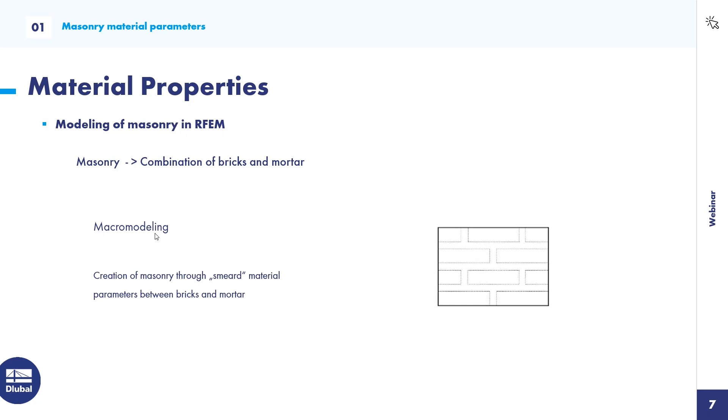The third and easier modeling approach is macro modeling. Here you create the masonry as one surface, and the material parameters between the bricks and the mortar are smeared above the whole surface. This means the modeling is easier and faster than the other two options. One small disadvantage is that if there's a crack anywhere in the masonry wall, you can't exactly define its location, for example in the mortar joint, because the parameters are smeared over the whole surface. But this macro modeling is what we use in RFEM.

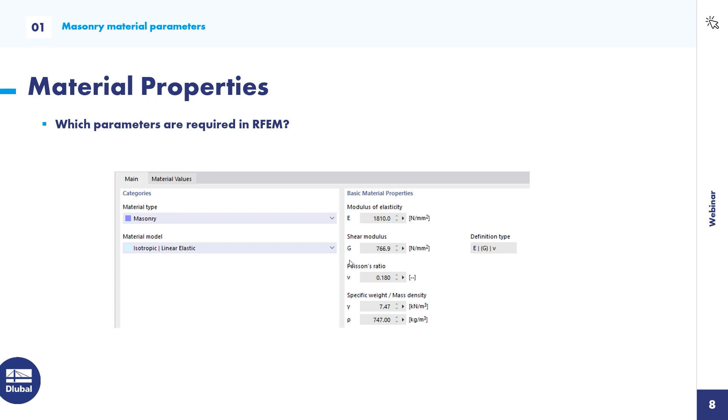So what do we need for material parameters in RFEM? For the first step, for computing the internal forces, we only need the modulus of elasticity and the shear modulus. This is everything we need for the first step. So how could we get an idea about these elastic moduli and shear moduli?

Here we find an answer in the Eurocode. The determination of the E modulus is defined by one factor. It's about 1000 for clay, in a range of 800 to 1250 for calcium silicate, or maybe 2050 to 2700 for manufactured stones. This, multiplied by fk, the characteristic strength, gives the E modulus. For small stones, for historic stones, you can add a factor for a small reduction of the E modulus according to the height of the brick and reference height. The shear modulus is quite easy because it's 40% of the E modulus in this direction.

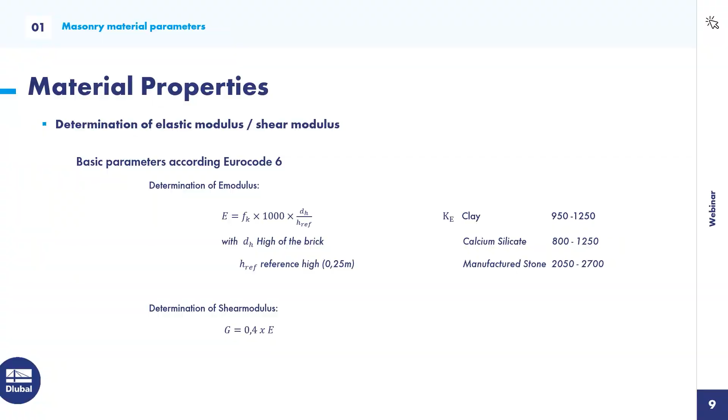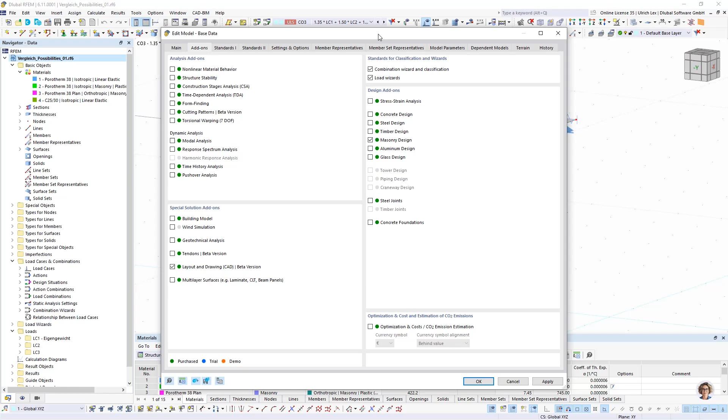Before I start modeling something, I want to check if in the add-ons in the base data my masonry design is checked on, because this is the most important thing if I want to work with masonry. Today I prepared a small example: one wall with a slab and a defined load above.

I want to show the differences between the material models. That's why I have created some materials, and I want to show you the differences now.

The first material is the isotropic linear elastic material model. This is our basic material model. It's the same for concrete or steel surfaces. You only need one E-module, elasticity module, and shear module to compute the internal forces.

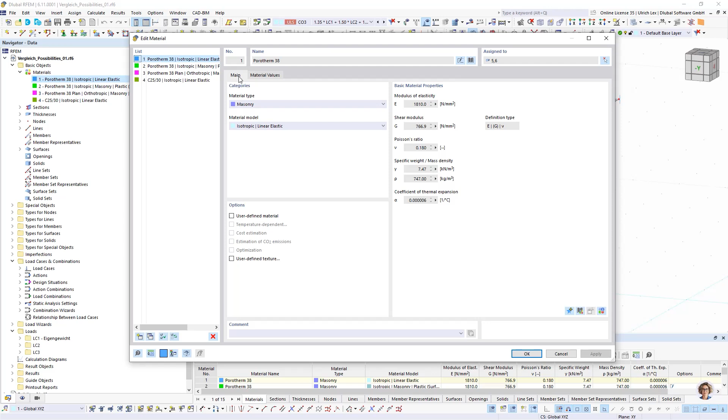When you have chosen the material type masonry, you also have the possibility to create an isotropic masonry plastic surface material model. The isotropic option means we have one E-module for both directions. In X and Y direction, we have only one module of elasticity.

With this plastic option, you can say that the limit stress for tension is reduced, because masonry cannot handle any stresses for tension - the wall will always crack if there is tension. The difference to the first material model is that there also tension can be computed; in this isotropic plastic material model it cannot. Here you have the possibility to set a limit of tension, but be careful - directly inserting 0 is not good, because the calculation will not work for a value of 0. So you have to insert a small value.

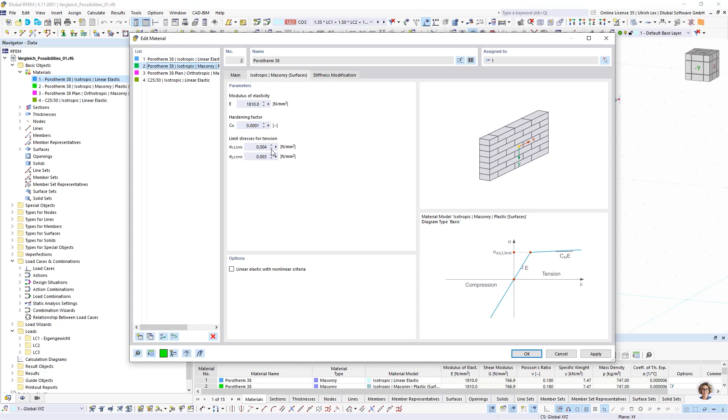The third option is orthotropic, and I would say this is the most exact material model for masonry, because here we have a different module of elasticity for the Y direction - the strong direction - and the X direction, the weak direction of the bricks. A shear module is considered too.

Additionally, you can limit not only the tensile strength, but also the compressive strength, and these allowable values from tensile and compressive strengths are computed according to the Eurocode. That would mean, if the calculation with this material model is done, then the design of this wall is done too.

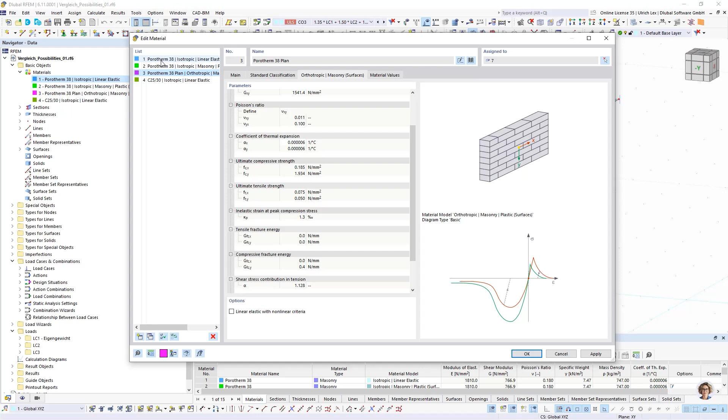So these are the three different material models we have in RFEM. As a last option, we have one type of thickness which we call shear-free. You can choose it in the thickness type: wall shear-free.

That means if you choose this thickness type, the wall can only transfer vertical loads from the top to the bottom, but no shear loads of the system. I will show you later where you can use this thickness type.

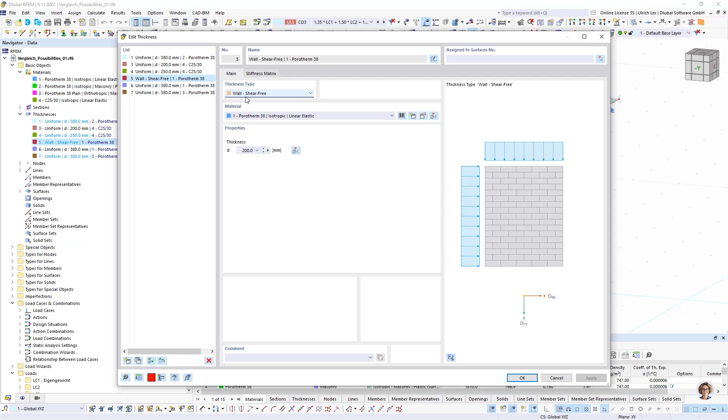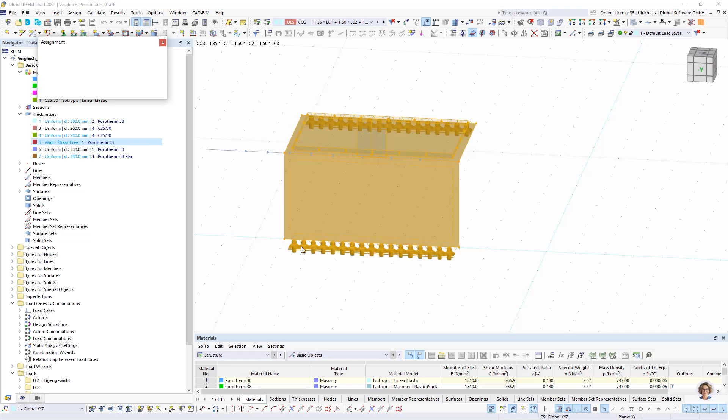Okay, to our system - here I created one masonry wall with a slab, and I want to assign this differently. I want to create more walls with copy, in this direction, and copy the loading too - 1, 2, 3 times.

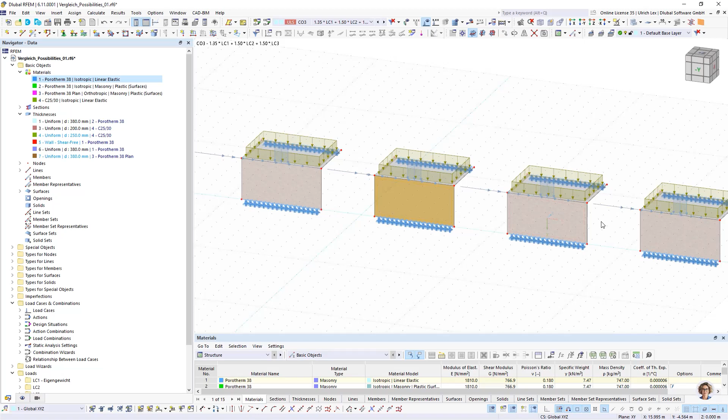So in the first wall I have to assign the isotropic material. In the second wall I want to consider the thickness with the isotropic masonry plastic. In the third case, I want to consider the orthotropic masonry plastic. And in the fourth part, I want to consider my shear wall with thickness type.

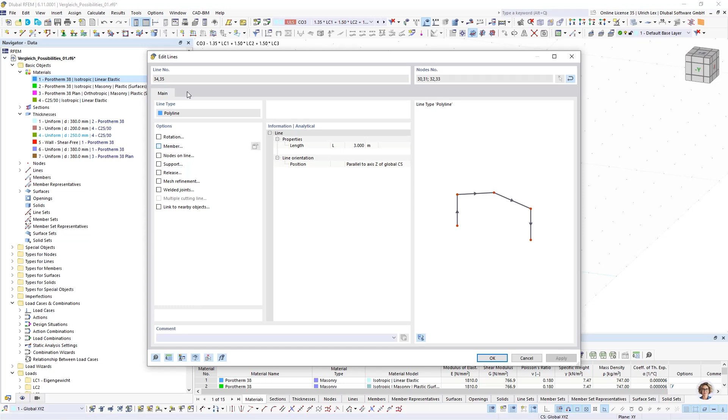For the shear wall thickness type and the horizontal load, I need some additional elements. That's why I added 2 beams, 2 members as a column, with a section from concrete. Okay, maybe for this case.

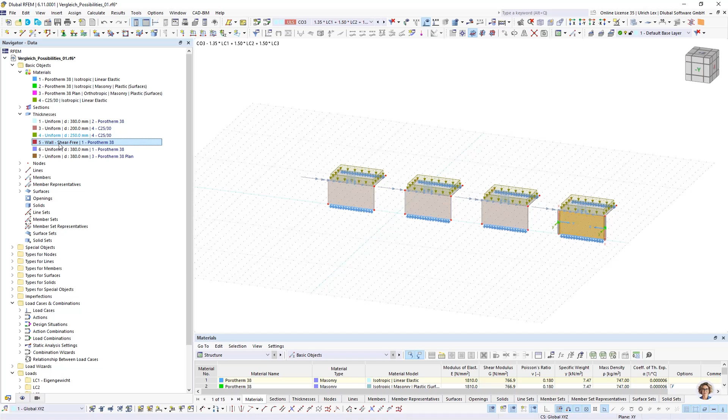So now I have defined in the first step the isotropic material model, the isotropic masonry, the orthotropic masonry, and in the last step the shear-free wall.

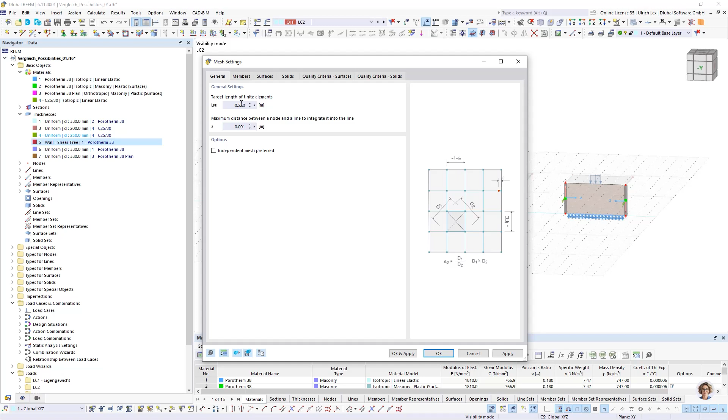So I want to take a look at the easiest load, the vertical load. A short look into the mesh settings - I have a mesh length of about 25 centimeters, and this is the value you have to use for masonry.

Okay, now I can compute this first load case.

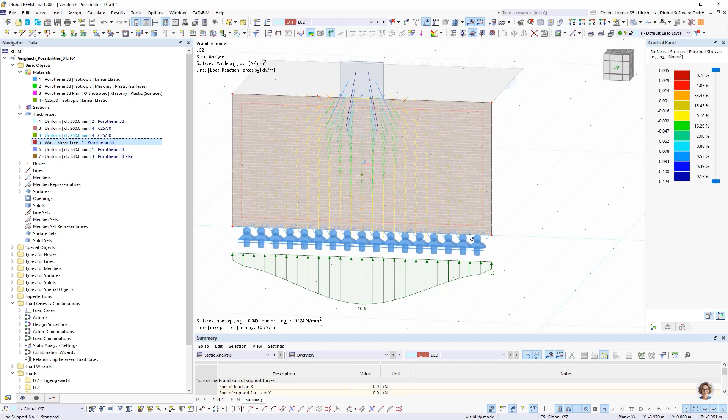So when we take a look on the results, I want to look at the stresses. Here I have something like the load trajectories, where you can see how the load is transferred in the surface. We see for our first isotropic system that the load is transferred above the whole length of the wall.

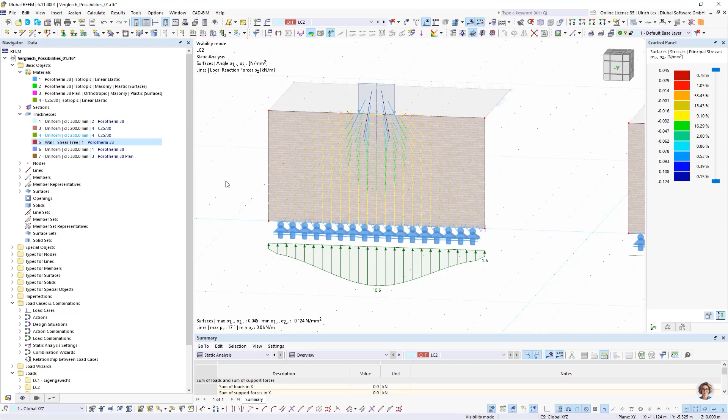This is not as expected, because we would think that the load is transferred at an angle of 60 degrees, and the other parts of the surface did not get any force. But for the basic isotropic linear elastic material model, it's not as expected for masonry systems. When we take a look on the second system...

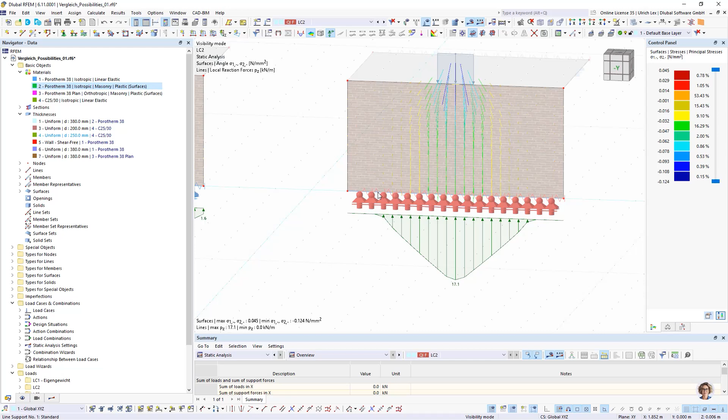It's better. Here we have no tension force in the system, and therefore I have not such a big transferring to the sides. You see on the support reactions that the load is transferred at some angle from the top to the downside.

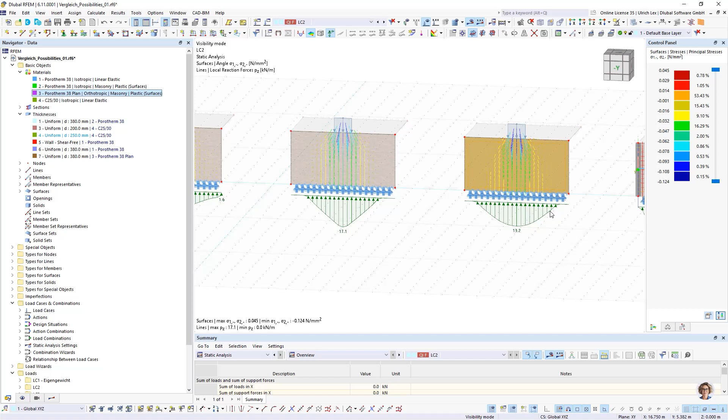When we take a look on the orthotropic system, you can see it's better than the other two. It's more homogeneous, and it's transferred like expected.

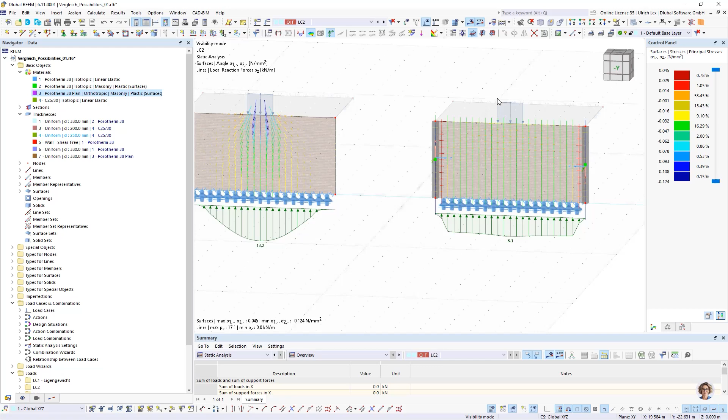In the last part, you will see that there are only vertical loads in the system because of the members on the side. You have a homogeneous transferring from the top to the bottom, but you have only straight loads in the system. It will be more clear when we have this horizontal load in the system too.

So when we add this horizontal load, I want to take a look on the load combination, because in case of a horizontal load, you always need a vertical load, maybe self-weight or an additional vertical load, because masonry cannot handle tension forces - you cannot compute only horizontal loads on the system.

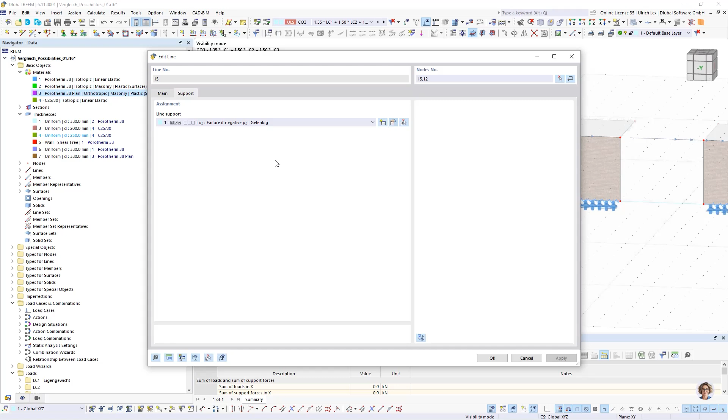For this calculation, I have to modify the support conditions. I have to fix it in the X direction. And now I can compute this load case again.

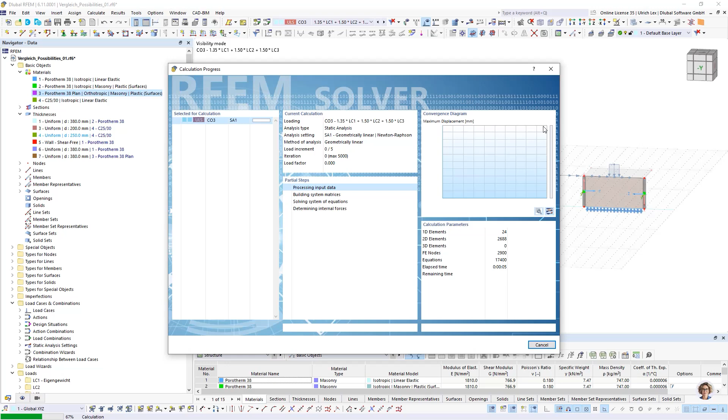Here we can again see that the load transferring of the internal force of our isotropic system is not as expected. Here I can change it one more time, then it's more clear.

I can deactivate the nonlinearity, so we can see also the tension in the system, when we compute it again.

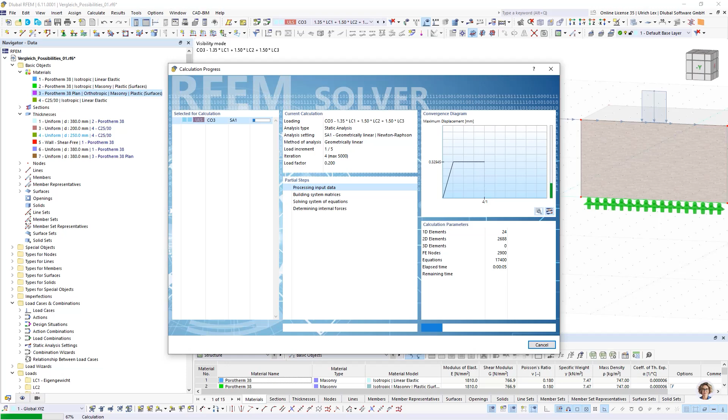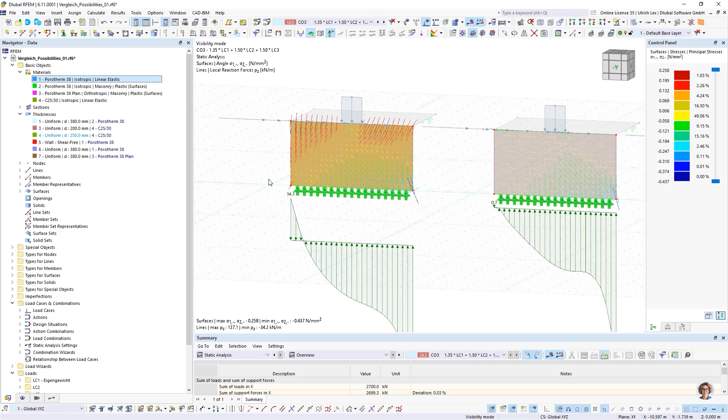So in our isotropic material model, it's quite better. You see that this horizontal load comes into the surface and it's transferred in this direction to the bottom of the surface. It's like expected, but...

because of the fact that we have only an isotropic system, so the E modulus in both directions is the same, this exact shear behavior of the masonry is not so well considered with this material model.

The most exact system is the orthotropic one. Here you can see that only compression is present like it's defined in the material, and the pressure is transferred in the right way...

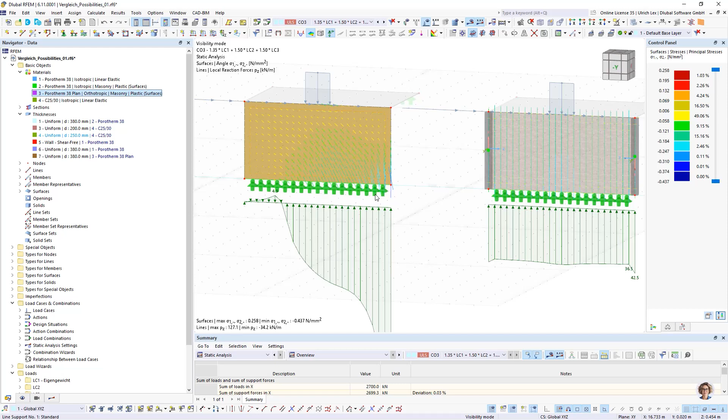to the supports. In the last option, you will see that the masonry wall gets no horizontal loads. There are only vertical trajectories in the system. Here also we can take a look at the internal forces.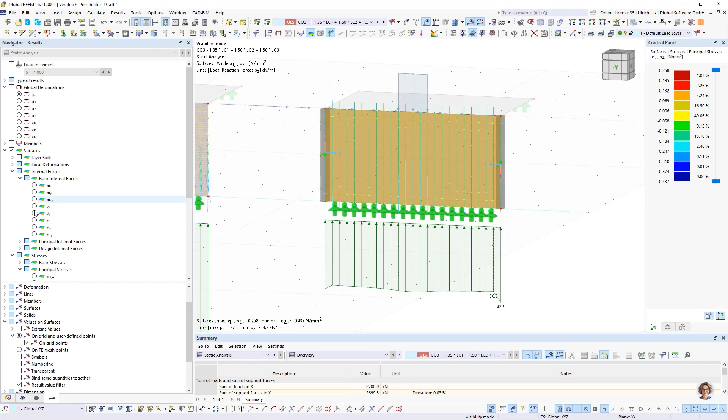We only have vertical loads Ny in the system. This horizontal load has to be - something has to be created for this horizontal load. That's why I added these concrete columns.

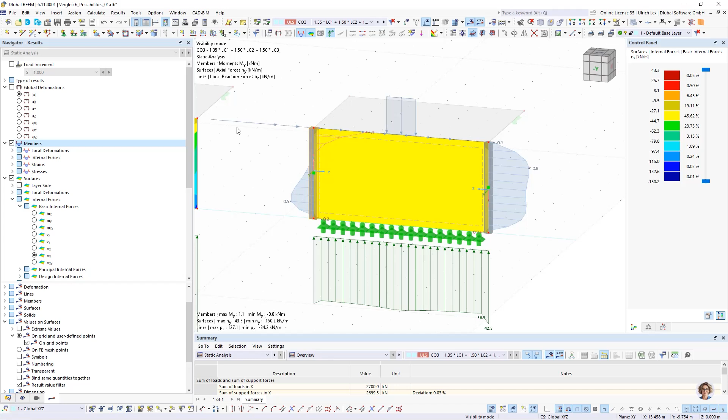You see here is a moment in this member, because this surface cannot handle shear forces.

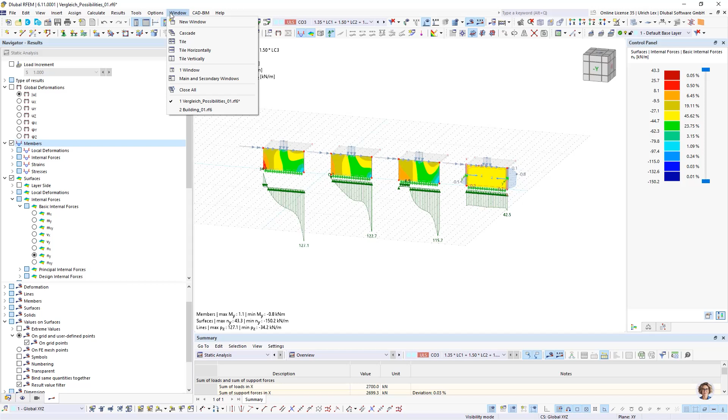Okay, this was the explanation of the different material models, and on this part I want to switch to the second example, to a small building where we can now create the masonry walls and compute this.

So I have created some building, two floors with concrete slabs. In the front, some columns in concrete, and in the back I want to consider masonry walls. Therefore I defined some materials.

One, the isotropic masonry material model for the surfaces that should act for shear forces, and for the walls inside the building, I do not want to consider shear. There I have to create the isotropic material model and use the thickness type wall shear free.

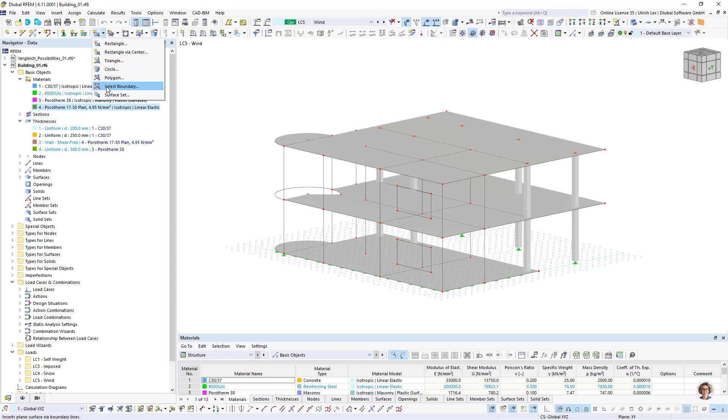So when this is defined, I can continue with creating the surfaces. I use the option boundary lines. I choose my thickness, and create the walls. So it's quite easy when the lines are there.

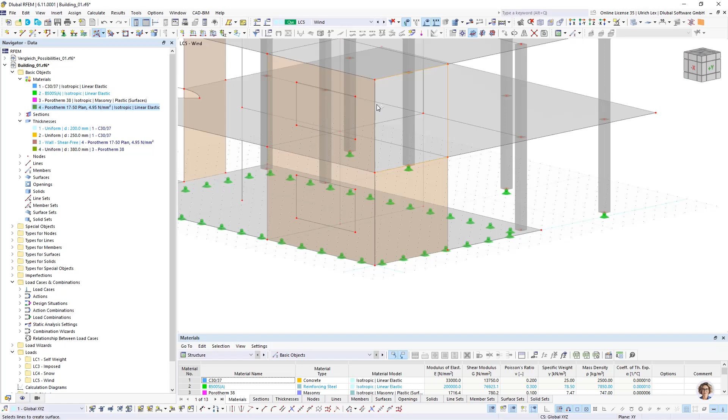And the last one. Okay, for the inner walls, I want to use the thickness shear free and create here my inner walls.

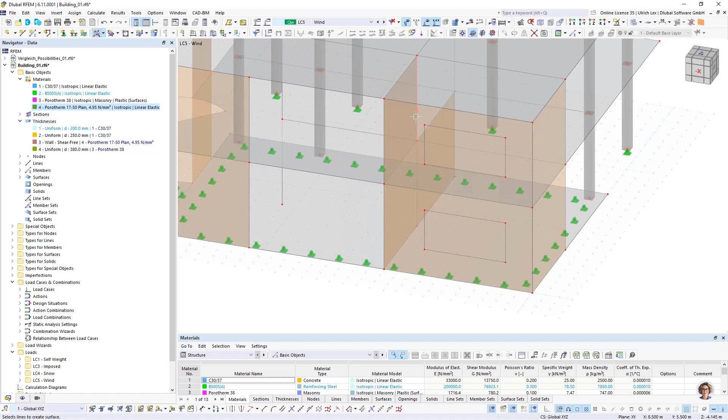So, and upside, I have here one wall. Here I see there is no column. I want to add it here as this member with the section in concrete.

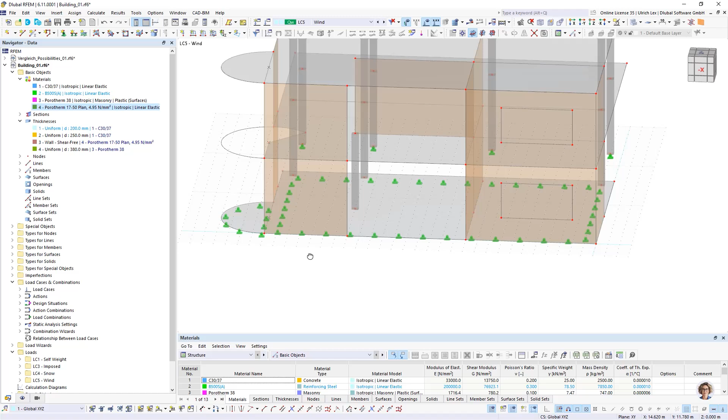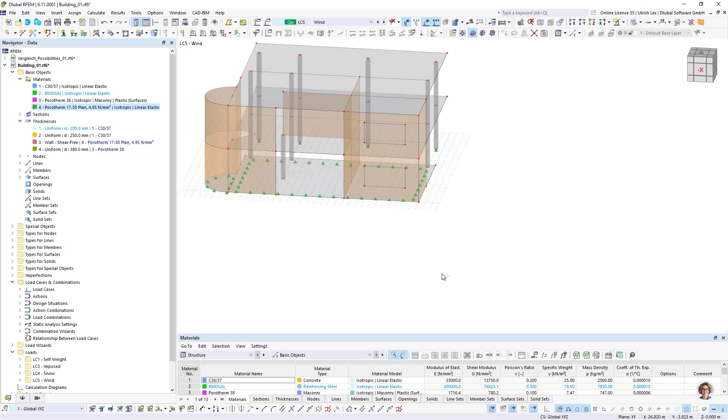Also a curved surface is no problem, but I have to use the quadrangle surface. One, two, three, and four. So then all walls are created.

On these surfaces, I want to add a window, maybe an opening. Here also I can use the option graphically and select only my lines. The opening will be created automatically.

On this part, it's important for masonry that when we have some big openings, we always have to assign something like a lintel above the opening, because the masonry cannot transfer or cannot handle tension forces.

And if a big load is assigned, or if the opening is too big, then there would be a lot of tension forces, and this would lead to an instability of the calculation, because the wall cannot handle tension forces, and they could not be transferred to the side. That's why we have to add something like a lintel.

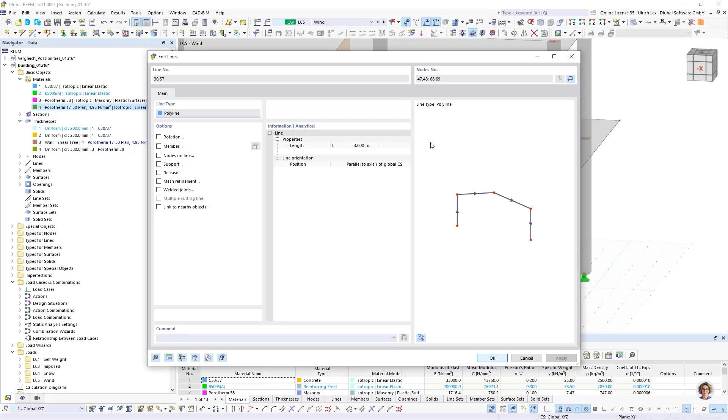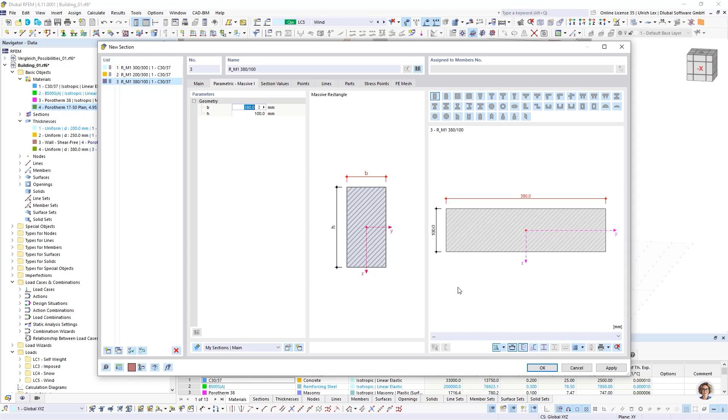I assign a member and create here a new section, maybe with concrete, with the width of the wall, and the height maybe 10 centimeters. Okay.

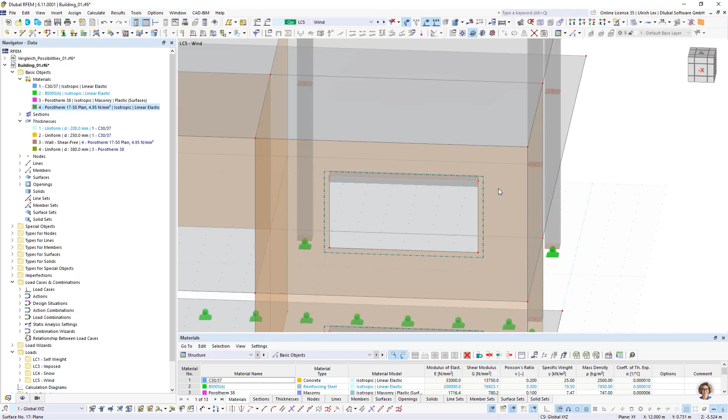For bigger openings, it would be good to create it inside the wall a little bit, so that the load is not transferred on one edge here. But in this case, it's okay in this way too.

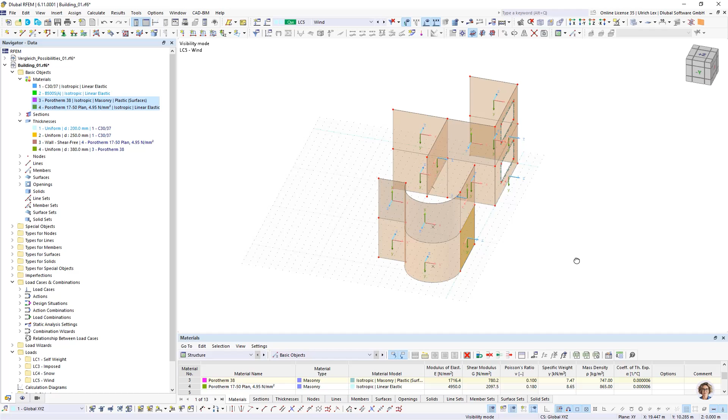Okay, then as a next step, I want to take a look. I want to select all my masonry walls. I want to take a look on the axis systems, because it's better for interpreting the results when the local x direction or the local axis system is oriented in the same direction.

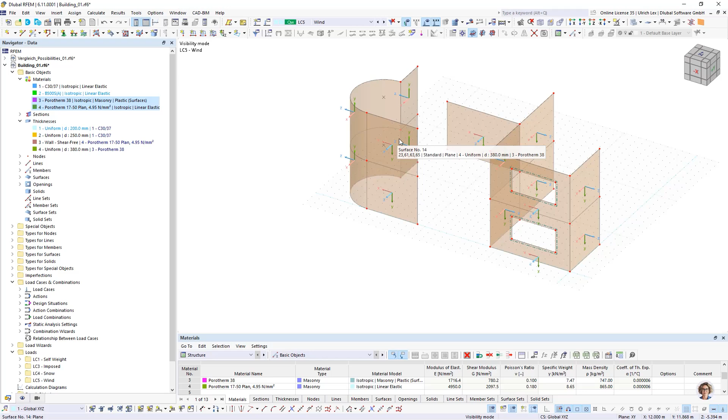Maybe local z goes outside of the building. Therefore, I have to reverse this, and here. Then I can say, when I take maybe a look on the stresses, that all stresses with sigma x positive is outside of the surface, and sigma x negative is inside of the surface.

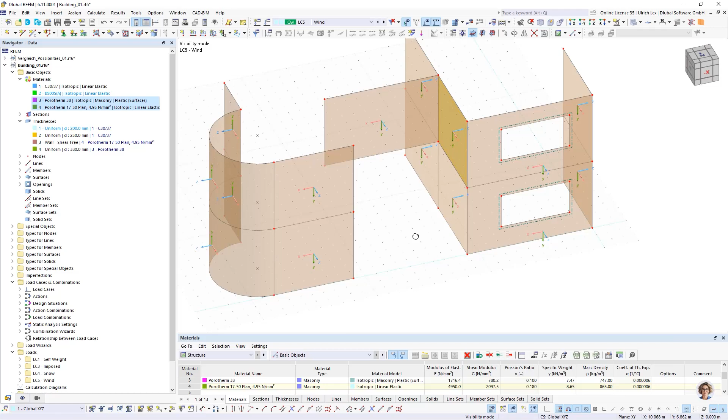Here it's okay. This wall is orientated in a different way. And then it's okay.

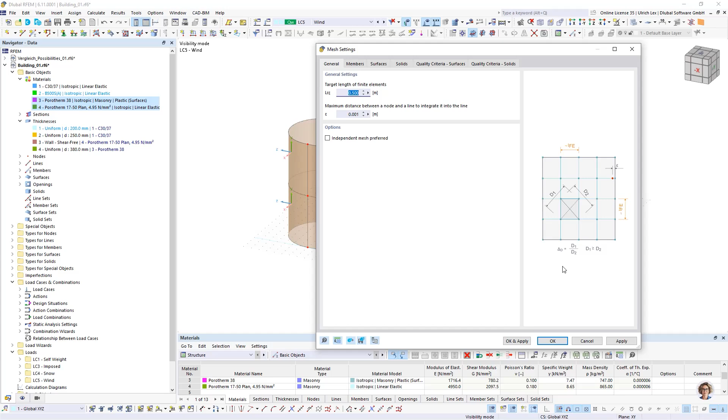As a next step, I want to take a look on the FE mesh settings. Here globally 0.5 meters assigned. It's okay for the concrete elements, I would say, but for the masonry I would use a finer mesh. Therefore I can select all surfaces, edit, and assign mesh refinement. I can create a new one, 0.25 meters. Okay.

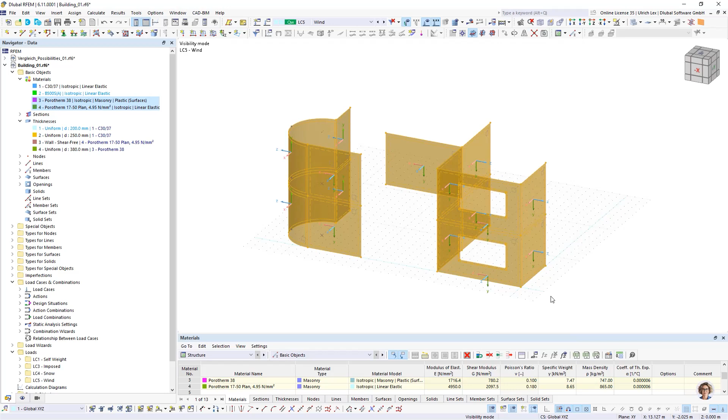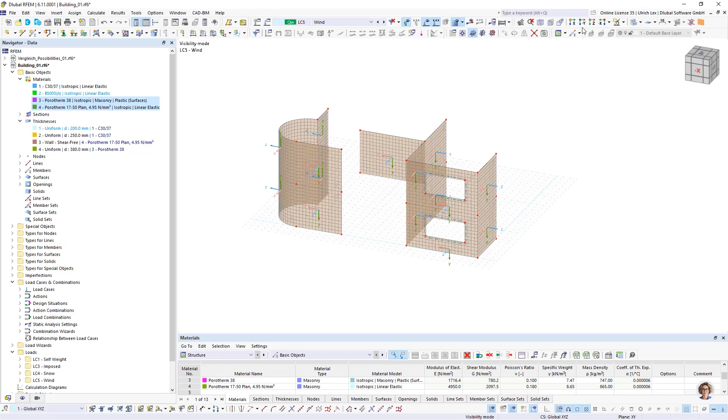And I want to check it, if I would say a nice FE mesh is created, or if I have to refine it in another part, but it looks good on the steps, then everything is okay. So then I think we have finished the modeling.

Then we can take a look on the loading. I want to deactivate the local, so we can take a look at the loading. I have created a load case for the self weight, for the imposed load, a snow load on the top, and I want to design some wind load in one direction, here in global x direction. Here I can create a new additional surface.

Again, I can select the boundary and use the stiffness type load transfer. Here I have a lot of different options for how the transfer direction should be, maybe only in x direction of the surface, in y direction, or in both directions with stripes. Or the more exact thing would be the isotropic FEA option, but in our case I think the stripes are okay.

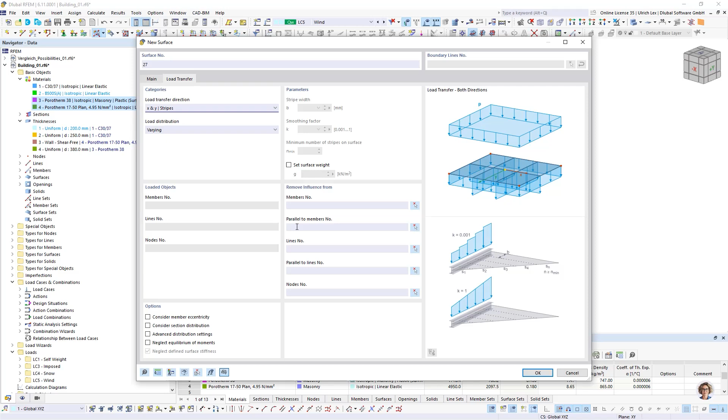I could remove some objects which should not be loaded. In our case it's okay. Can continue with okay, and can create here this surface. The same I can do for big openings.

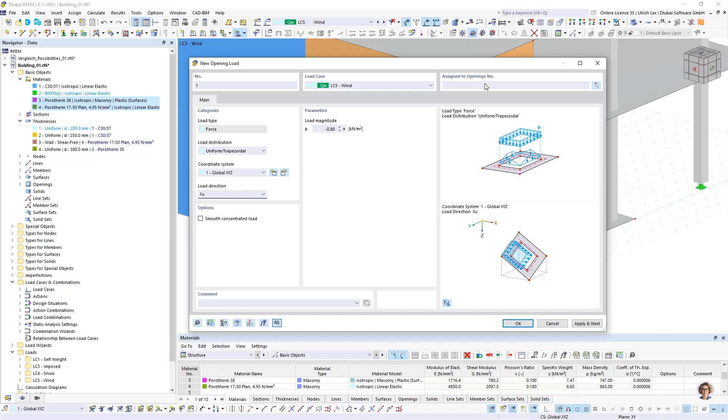For openings, I would have a second option, to create directly a load on the opening with new opening load. Here I want to show both options. For the new opening load, I can use one value in X direction and can choose opening. Okay. Then automatically this load will be transferred to the lines around the opening.

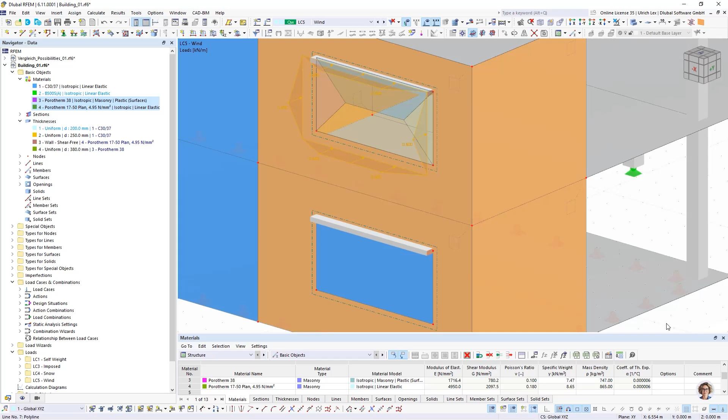I can show also the load on the boundary lines. So for the load transfer surface, I can use the default or the basic surface load, with the same value in my case, and can choose the surfaces where it should be acting. Okay.

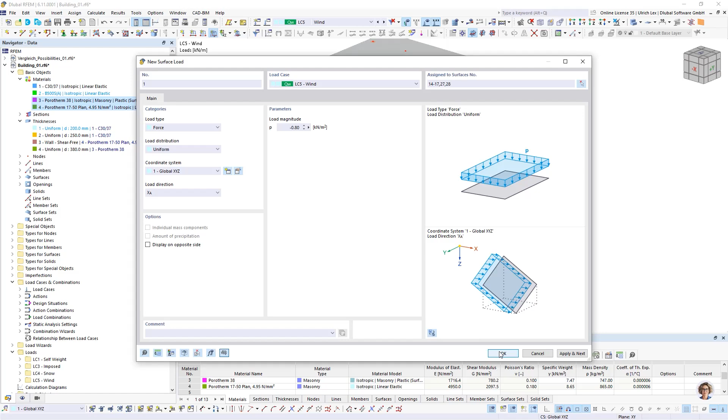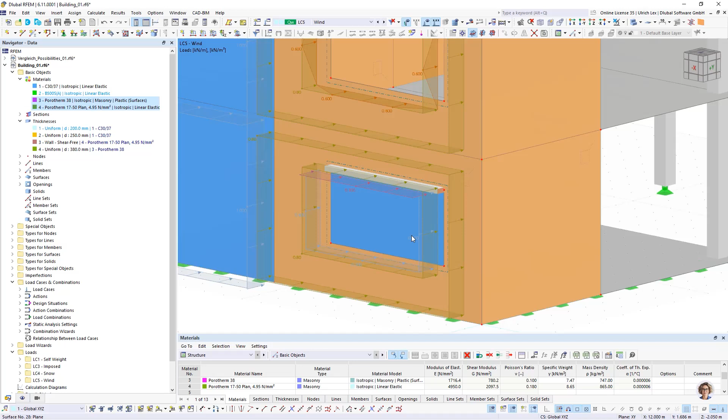Also for the load transfer load, I can show the distribution surface, what is acting on the separate lines. Here you see it's transferred to all lines in a linear way in the stripes of Y and X directions.

Okay, if we have everything defined, then we can start with calculation. Here I want to compute maybe one load case to take a look at the results.

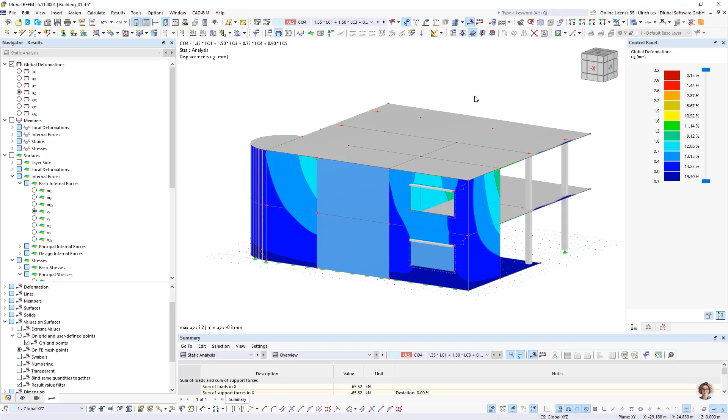The calculation was done without any errors. That's good, so everything is okay.

So now I want to show you the results of these inner walls, where we had used the thickness type shear wall, shear free wall.

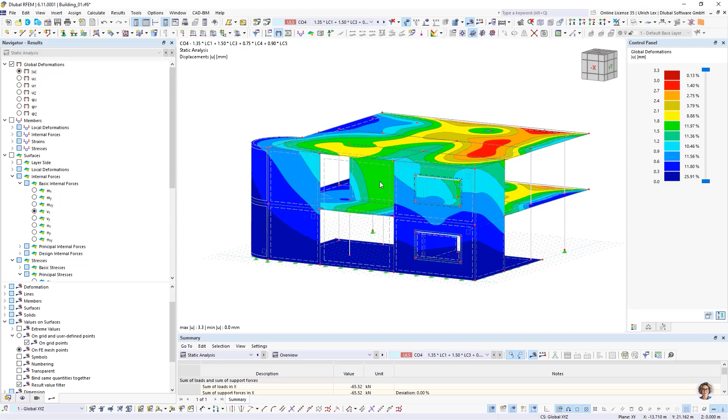I want to select only this. So here I can see when I take a look at the internal forces, the shear forces are 0. Also the moments are 0.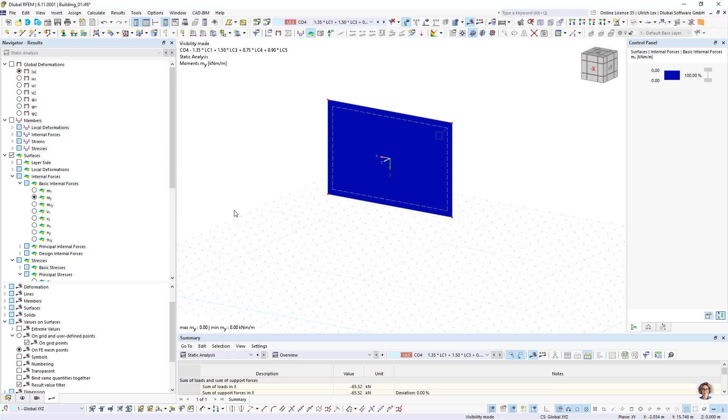When I take a look at the axis system, then my my is nearly 0. It's not exactly 0 because it could not be exact 0 in calculation.

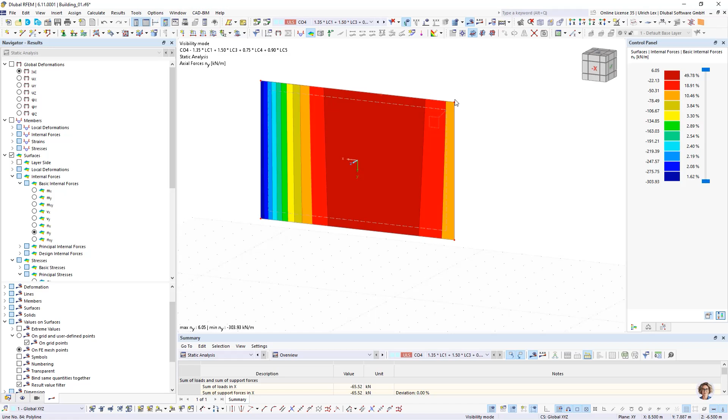So there are small loads in X direction, but I have big forces in Y direction. Therefore, I only have loads transferred from the slab in the second floor to the slab in the third floor.

That means this option or this thickness type is good when I have masonry walls where I have maybe a concrete structure that takes my shear forces, and I want only have the self-weight or a transferring of loads from the upper slab to the slab downside. Then I can use this thickness type shear free, or this wall shear free.

In case that the masonry wall should also act for shear forces, then we should use this isotropic masonry or this orthotropic masonry.

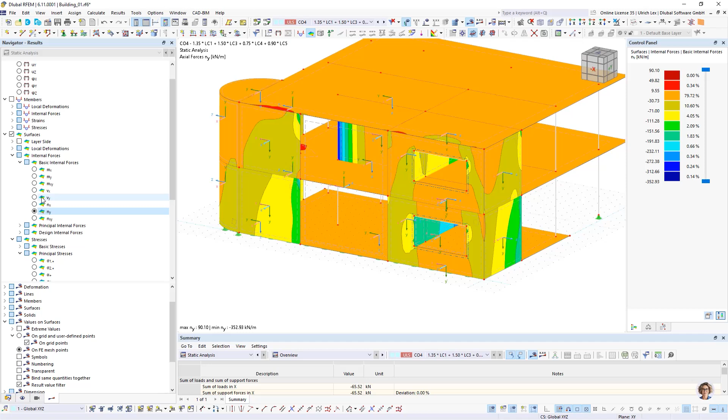For this isotropic masonry material model, I can now take maybe a look here. Here we see that we have load transferring, we have stresses in X and Y direction.

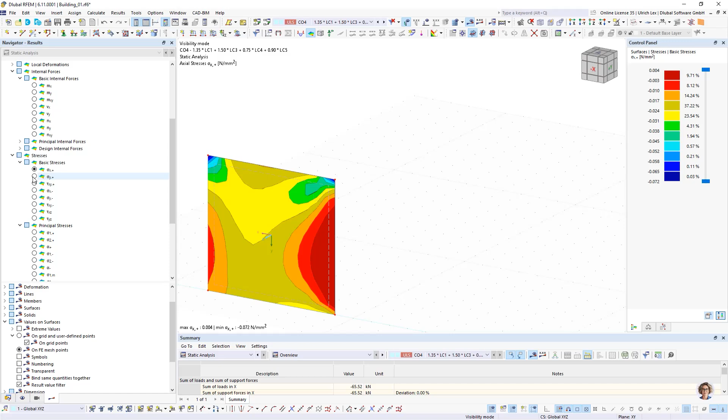When I take a look at this wall again, then we see that we have only tension forces in the defined limit, tension forces in the defined limit, and the pressure. So how could we interpret these results?

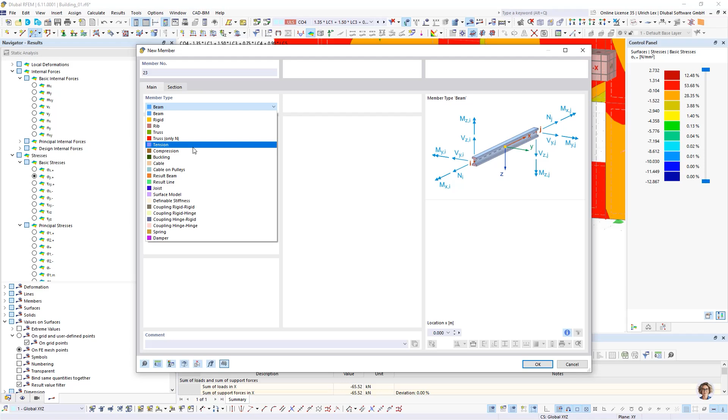You could insert here again a result beam. With the result beam, we could use here a block with 1 meter, where we want to include objects, maybe only this one.

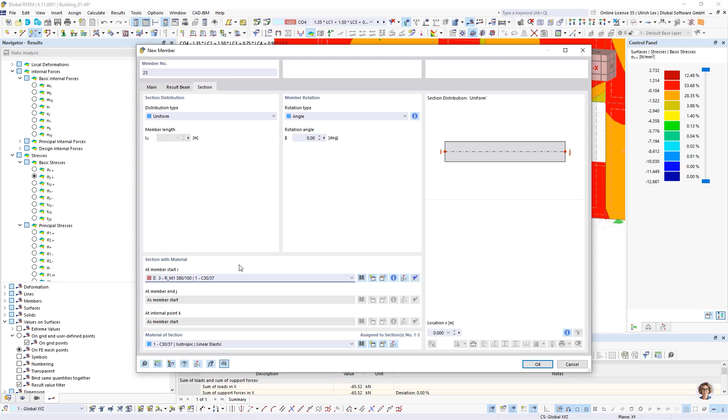Okay, I can create it, it's not important, but I create a new one. Stiffness, because the result beam does not have a stiffness.

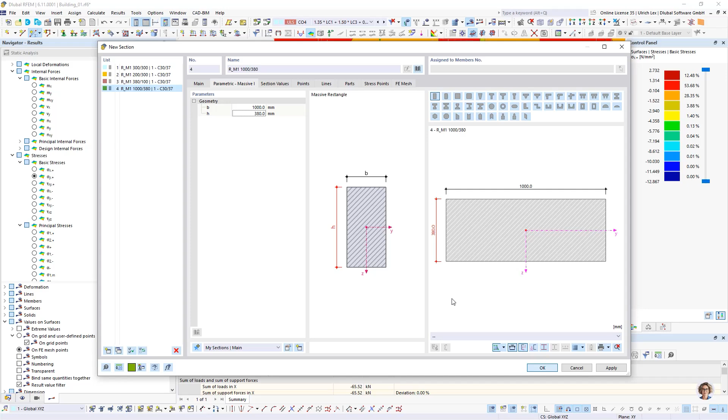For the calculation, we have here 1000 to 380. Okay, and we can add it here.

Then we have to recalculate it, only because the lines are divided or integrated in the surfaces now. But this result beam has no stiffness for this calculation now.

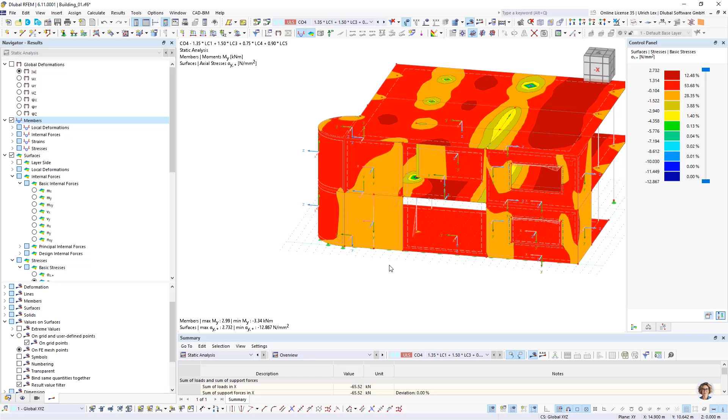But now you have the possibility to take a look at member results.

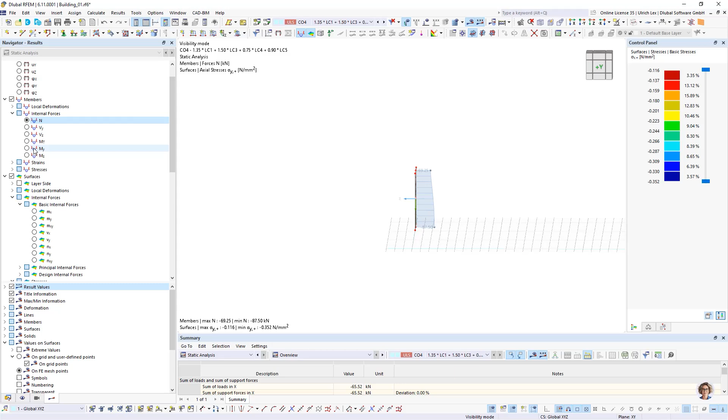Here you can see the internal forces, maybe for the normal forces, or for the acting moments in this wall.

Because we use this isotropic masonry, you could use now the results of this result beam for an additional design of the masonry surfaces too.

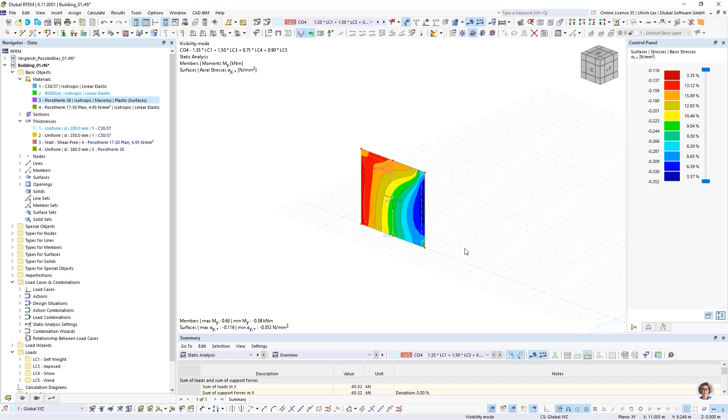So this would be all what I want to show you today. I want to say thank you for listening. I hope you enjoyed it, and I want to give back to Andreas.